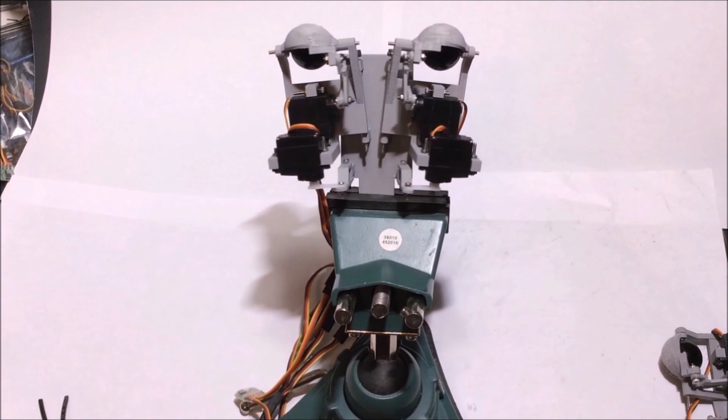Well, I'm going to show you. I got two of these new blink mechanisms I designed, just to show you a little bit more expressions with certain things. I'm also working on an eye video just to show you what I could put in these things. But this, it's got 4 servos on it, and I'm still trying to keep things small for the resin printer. And so I can put some type of skin, and this is going to be mainly for testing skin and showing different kinds of expressions.

But I really like this mech here. It's just a simple deal, but I like the tilting of the eyes, more cat-like or wolf-like. But what y'all think?

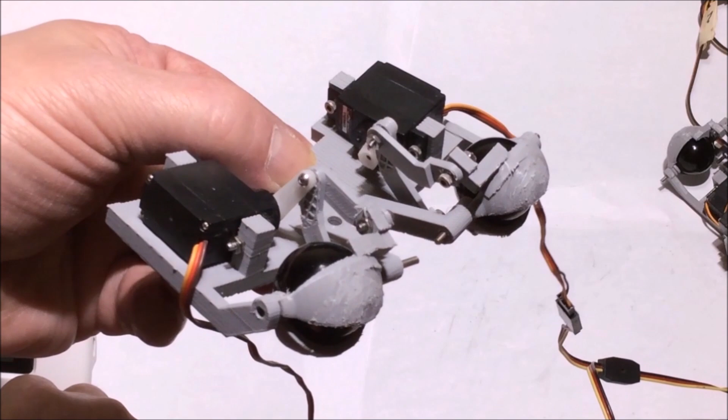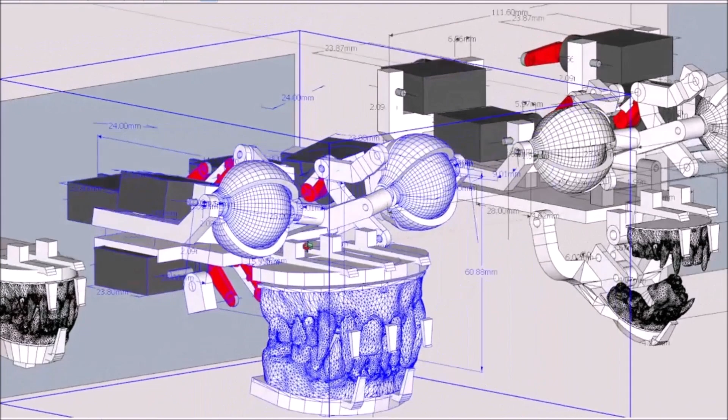Well, this is some of the design things I'm working on. The eyes that I'm working on now are 22 millimeter beads, and I'm trying to still keep it kind of small. And I was wanting to do these with wing servos, but I had these available, so I want to give this a try. But it would be narrow for the tilt mechanism, because the tilt can't have anything underneath it to where it bumps it.

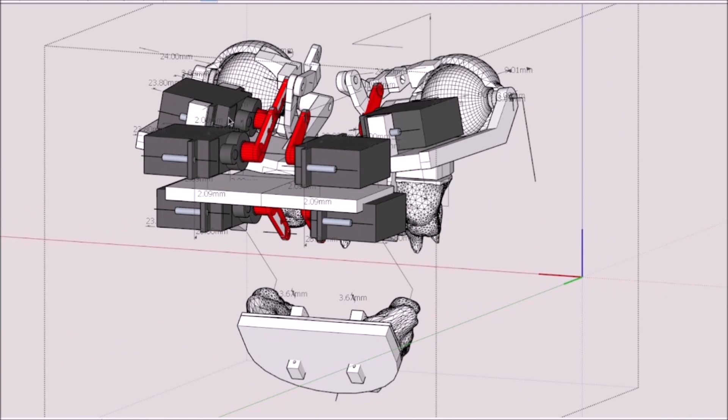But I like what I'm working on now, giving it a bigger mouth and more lip movements and seeing the canines. But I'm working on an eye right now for these things.

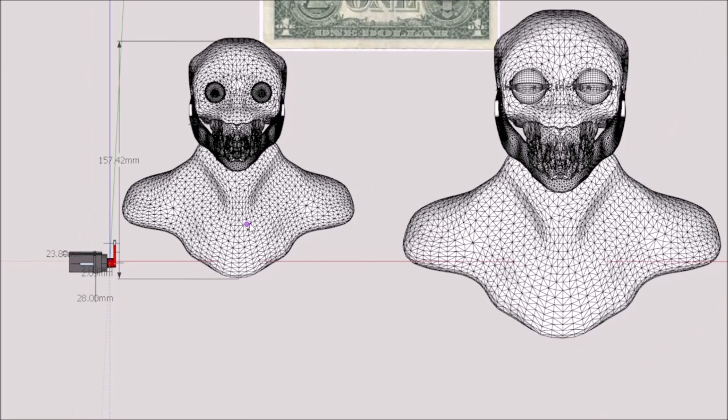Hey, I'm just doing some concept work here, just to show too. Now, this is like a creature bust, and you want to do a creature on it. It's 157 millimeters, okay? Now you can get the jaw to move with one servo. Eyes not moving, just one servo, okay? Well, that just shows you the size compared to the dollar there. But you could get the jaw to work.

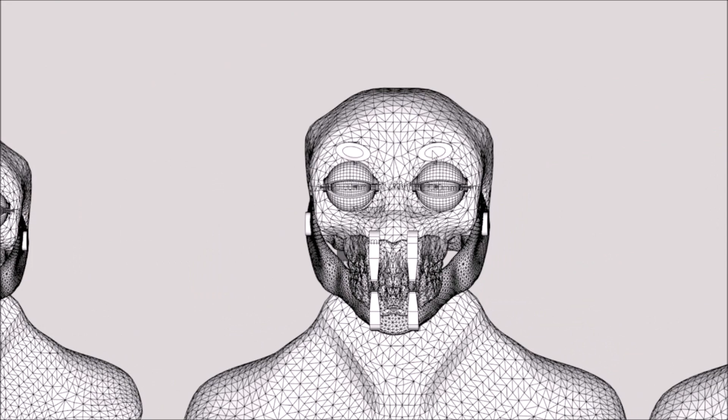Well, if you want the eyelids to move, it'd be a little bigger. You move eyelids and the lower jaw with 2 servos, and so on and so forth. Like this one here, you'd have the brow, the eyelids, and the jaw moving. Here you would have the brow, the lids, upper lip, bottom lip, and the jaw moving. The amount of movements is the number of the servos.

This is some more test movements of this animatronic. I've just been tinkering around with it. It's pretty much done. The lower lip does move, but I've got to get a better cable for it, guitar string. It has a housing to it to make it slide better, but the movements are what you see here.

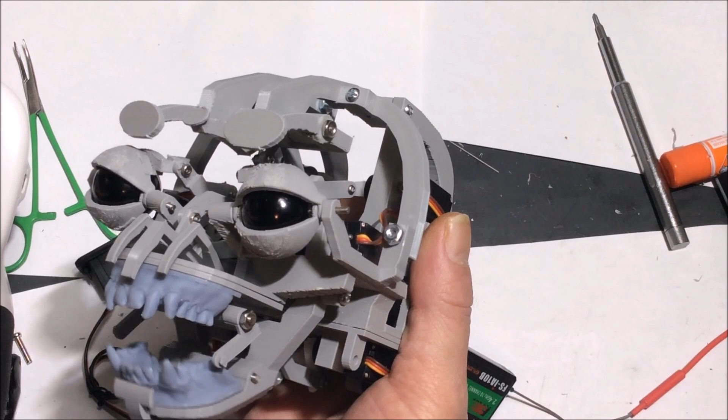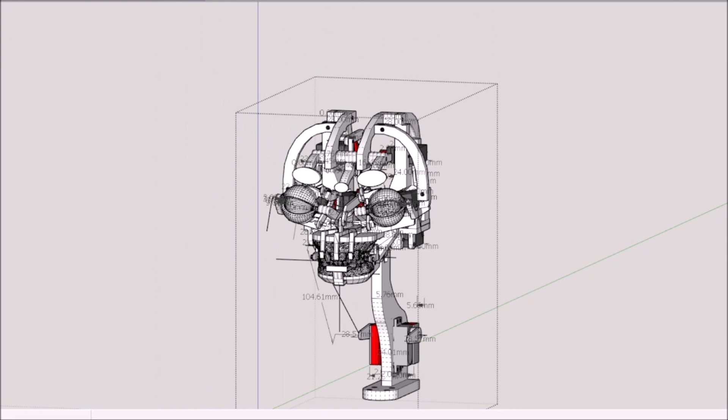I have a lot of people that ask me how I do these things, and I design them, but there's 31 printed pieces to this, and the eyes are 22 millimeter gumball beads, and it has 8 servos in it. And once again, people ask me how, so this is the design, and it has 8 servos in it. And here's the 8 servos, and here's the 9 linkages that I designed to move all the moving parts. There's 31 printed pieces on this animatronic, and I go to places like Motion RC.

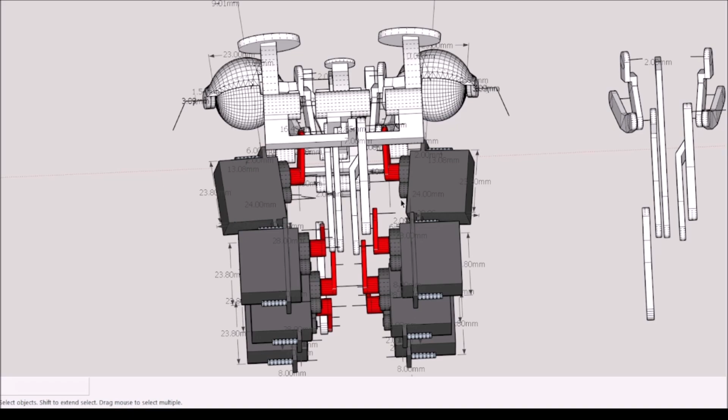You can get them in, and these are like 9G servos. They're maybe anywhere from $10. You need to get metal and digital, but then you need a Y cable for the eyelids, because you got 2 separate mirrored servos, and you need one of the servos to be reversed, or buy a reverser, and get them in sequence. But that's part of it. Now these servos are micro servos.

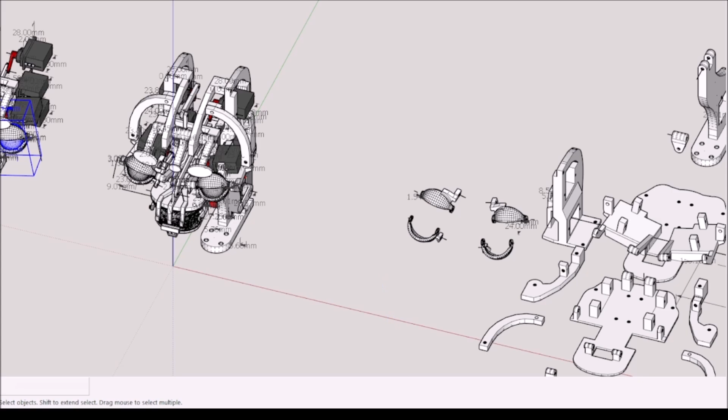They got like a 28 millimeter screw point for the servo socket, and here is the 31 printed pieces that I designed and STL files, and you just put it all together and you get it to move. It's really, I guess, the closest to being Dr. Frankenstein. And it's pretty neat to see it move.

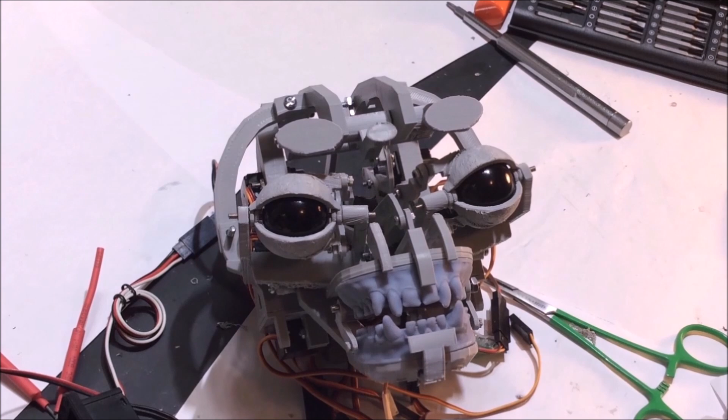All right, this animatronic is pretty much working. This is me tinkering. You'll see throughout the videos me tinkering away at this thing, getting it all dialed in. But it's pretty good. I'm happy with it. The lower lip does move. I have to get like a guitar string or a small... I have some wire, but it's not flexible enough, and it's the small stuff because I do have a small cable housing.